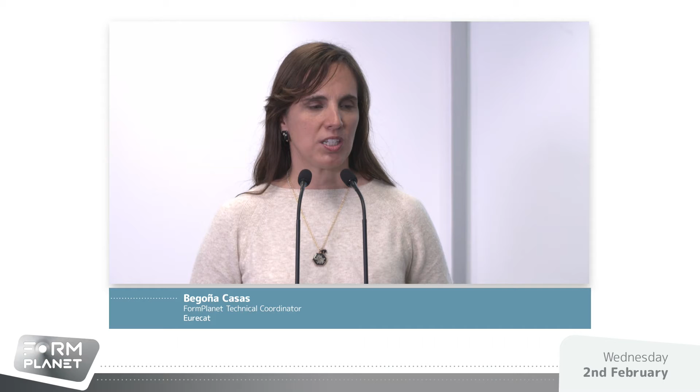Thank you very much, Michele. I'm going to present the demonstrators of the FormPlanet project. As we have mentioned during this day, we performed 19 demonstrators from different sectors and metallic alloys, to prove the effectiveness of the developed advanced testing methodologies and modeling approaches.

These demonstrators cover the whole value chain of the sheet metal forming industry, including sheet material developers, part makers, and end users. Concerning sheet material developers, we applied different characterization methodologies and simulations to optimize the forming processes of high-strength sheet metals, such as advanced high-strength steels, different aluminum alloys, and multi-layered sheet metals.

Also cold-rolled steels and stainless steels. Two case studies were performed with the company Aludium, an industrial partner of the project that produces aluminum alloys. These case studies concerned the automotive and cosmetic packaging sectors.

In the first one, we predicted the edge cracking resistance of a new aluminum alloy by evaluating the fracture toughness using the methodology based on the essential work of fracture, explained before in session 1. The second case study related to cosmetic packaging.

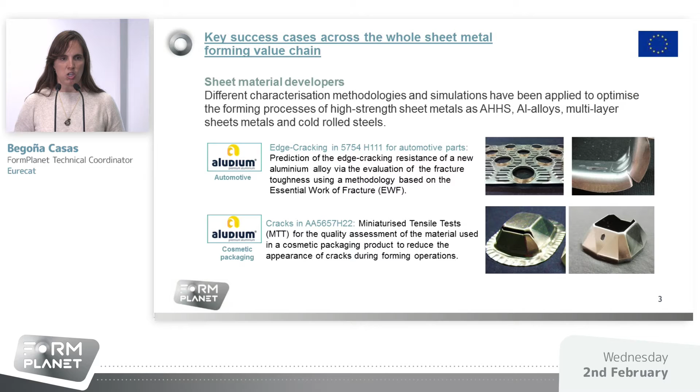Another sheet material developer is ArcelorMittal. It produces steels for automotive applications, and this case study consisted of predicting crash performance in advanced high-strength steels for hot and cold forming through lab scale testing methodologies.

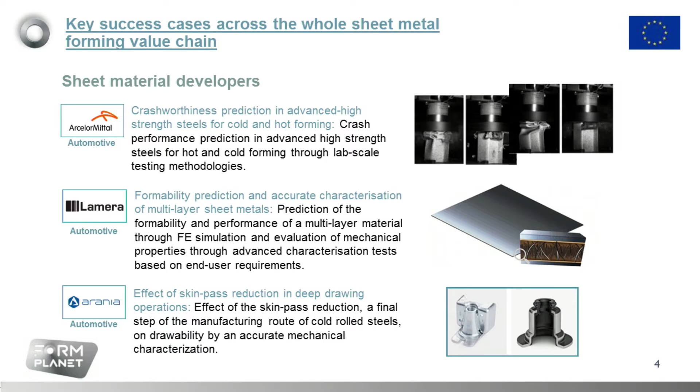Another case study was done with Lamera, who produce multi-layer sheet metals for automotive applications. In this case study, we predicted the formability and performance of a multi-layer material developed by them through finite element simulation, evaluating mechanical properties through advanced characterization tests based on end user requirements.

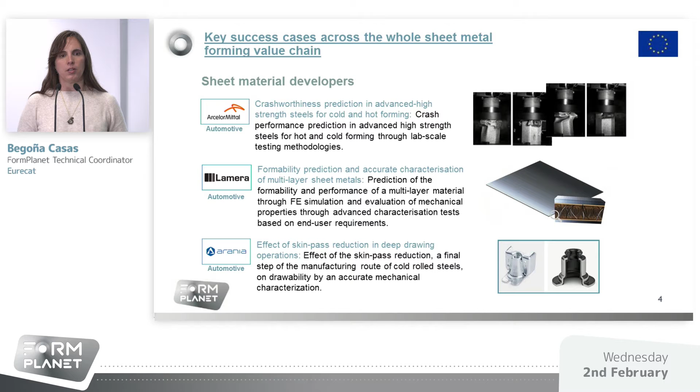With Arania, which produces cold rolled steels for automotive applications, we studied the effect of skin pass reduction, a final step in the manufacturing route of cold rolled steels, by performing drawability tests and accurate mechanical characterization.

Also with Arania, we performed another case study related to predicting the behavior of material for fine blanking operations through fracture toughness evaluation tests using the essential work of fracture methodology.

With Replasser, one of the selected companies for the open call, which produces hybrid composites, this case study was for the home appliances sector. We evaluated the formability of a novel sheet metal product consisting of two metallic coated layers bonded by an adhesive, through drawing tests and bending tests.

With part makers, the test sites performed tests and simulations to try to improve the manufacturing processes of complex parts with high-strength sheet metals.

One of these case studies was done with the company Arçelik, which produces home appliances. We worked on the characterization and optimization of the clinching process in the manufacturing of washing machine drums, using advanced mechanical characterization tests and FEM.

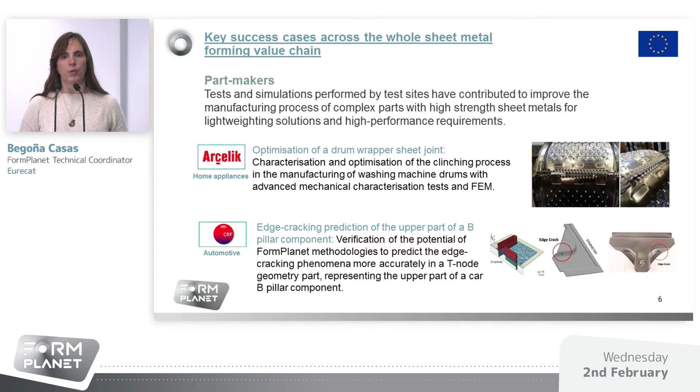Another case study was done with CRF for automotive applications. In this case study, we verified the potential of the FormPlanet methodologies to predict edge cracking phenomena in a T-node geometry part representing the upper part of a car B pillar component.

Another part makers case study was done with AP&T for automotive applications. We assessed the reduction of the try-out time of hot stamping dies by applying a FEM sheet forming simulation model based on material characterization data and forming parameters obtained during the hot forming process.

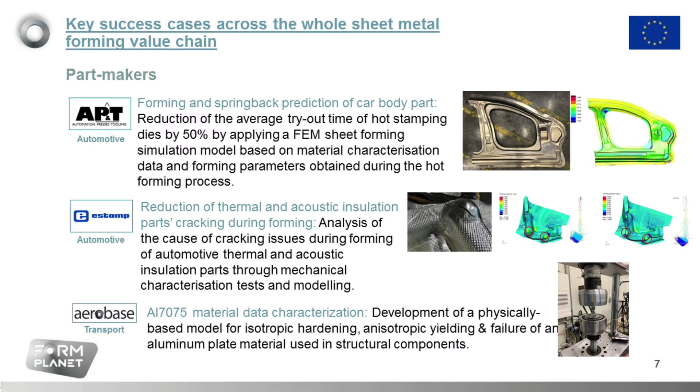Another case study was done with Estamp, another partner of FormPlanet, also for automotive applications. We performed analysis of the cause of cracking issues during forming operations of automotive thermal and acoustic insulation parts, through mechanical characterization tests and modeling developed in the project.

Another company that was selected during the open call is called Aerobase.

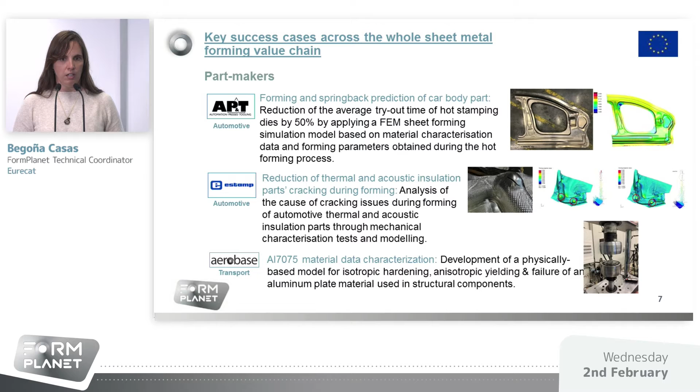The sector is transport, and for this case study, we performed the characterization, material data characterization of aluminum alloy 7075 for the development of a physically based model for isotropic hardening, anisotropic yielding, and failure of an aluminum plate material used in structural components.

Another company selected in the open call was Casconos Holding, also for the transport sector, and for this case study we characterize press hardening steel by fatigue. We measured the fatigue resistance, the hydrogen susceptibility, and also performed process modeling of a novel developed martensitic high-strength steel.

Another company selected in the open call was Stamp for automotive applications, and with them we study the combined influence of the pre-strain and the trimming on the edge ductility of high-strength steels.

Other company of the open call was MA for transport applications. We characterize press hardening steels. To do that, we performed finite element simulation forming, edge flangeability tests, diffusible hydrogen measurements, with the idea to prevent cracks in the flange area of a component manufactured by the press hardening steel process.

Other two part makers that were awarded in the open call were Mubea for transport applications and Pol-Welding for machinery and manufacturing applications. With Mubea, we have optimized the forming process of laser welded steel tubes with flattened ends made by cold stamping. In this case, we performed miniaturized tensile tests, finite element analysis, and fatigue tests to characterize and optimize this process.

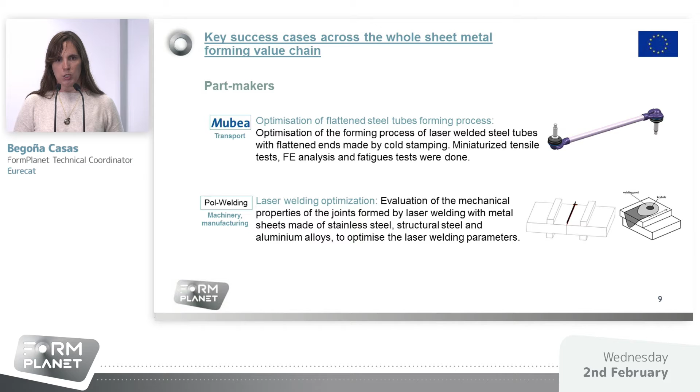In the case of Pol-Welding, we performed an optimization of laser welding. We evaluated the mechanical properties of the joints formed by laser welding with metal sheets made of stainless steel, structural steel, and aluminum alloys to optimize the laser welding parameters.

And finally, concerning end users, we performed two case studies. The first one with CRF for automotive applications, and this case study consisted in the implementation in a real production plant of an equipment for the monitoring of hydrogen content in raw materials and stamped components for transport body-in-white parts made of USIBOR 2000.

And the last case study was performed with Arcelik in the sector of home appliances. The idea here was to improve the forming behavior of a refrigerator compressor shell. We investigated the cause of tearing and thickness reduction on the surface of the shell during deep drawing via sheet metal characterization tests.

These are the 19 demonstrators that we have performed during the FormPlanet project, both in the main task and in the task concerning the open call, and that's helped to validate the characterization methodologies and modeling approaches that we have developed in the FormPlanet project.

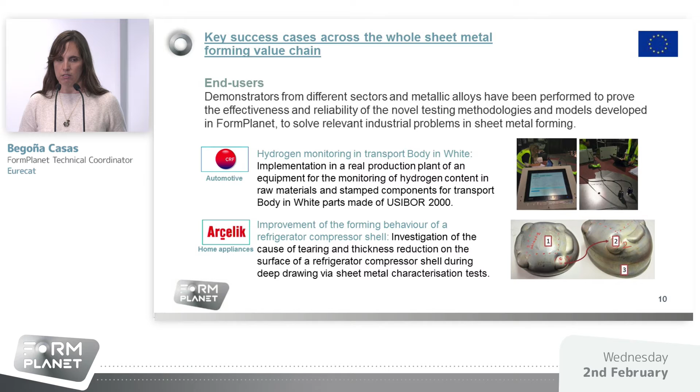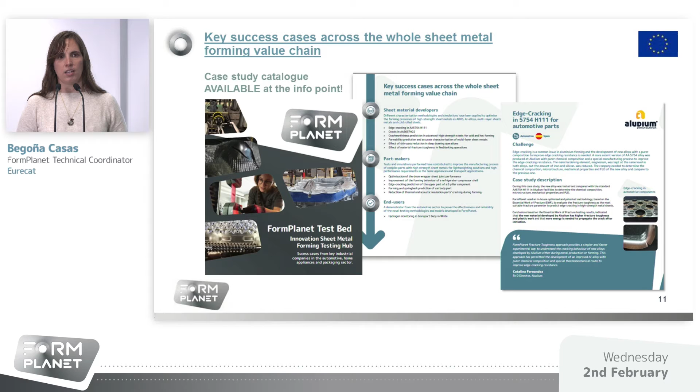In this session, some of these case studies have already been explained a little, and also in this session some of them will be explained with more detail. But you can find all the information in the case study catalog available at the info point. Thank you very much for your attention.

Thank you, Bego, for your interesting presentation and for giving us the opportunity to discover all the test cases analyzed during the FormPlanet project.

Okay, so now is my time.

In this presentation, as anticipated by Begoña, we will see the hydrogen monitoring in press-hardened steel used for body-in-white components. This is the agenda. We will see briefly what we have done using the USIBOR 2000, a new press-hardening material, the measurements we did together with Letomec about the diffusible hydrogen on the stamped component and the raw material, and finally the conclusion.

First of all, the goal of this study is to implement in a real production plant a control of diffusible hydrogen to prevent delayed cracking due to this kind of element.

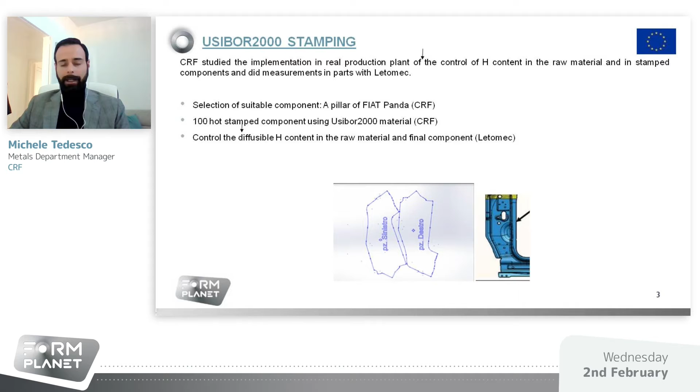For this purpose, 100 blanks were stamped using USIBOR 2000 in ex-FCA plants, and on that, together with Letomec, we checked the value of diffusible hydrogen into the raw material and on the final components. Here are some pictures as the material arrived in our plant.

Thanks to the collaboration with ArcelorMittal, they provided us the blanks directly laser cut to be stamped as they are, and each blank was marked with several codes that specified different conditions of the process.

The conditions and parameters that we studied during this activity are different. We focalized our attention on two different parameters. The first one is the dew point control that we have in the oven, and the second is the dwell time, the time that the blanks stay in the oven.

The dwell time usually for the press-hardening component with a thick layer of coating is between 300 and 600 seconds, while the dew point generally is set up around -7 to -5 degrees centigrade. But we tried also to modify this parameter to see what could be the results on the final component.

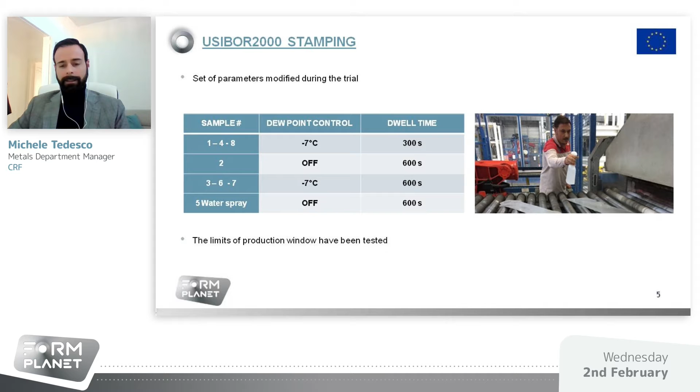Based on that, we would like also to test the worst condition, indicated as number 5, in which we turn off the dew point control in the process. We leave the blank at the maximum time in the oven, and as plus, we sprayed water on the upper side of the blank.

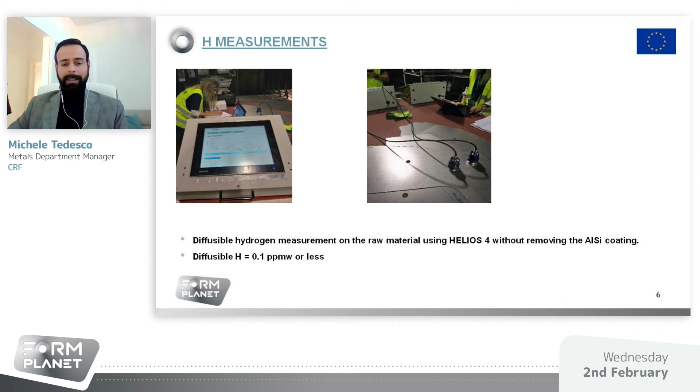This was to test the limit of this material and of our process. Before stamping the component, we did together with Letomec the measure of diffusible hydrogen on the raw material as received in our facilities. To do that, we used the Helios 4 system without removing the surface coating, and we found that the material was very clean; very poor diffusible hydrogen was detected, less than 0.1 part per million.

After the stamping, we performed the same analysis, the diffusible hydrogen measurement on the stamped component in different areas of each component, because changing the areas, the concentration could also change, since the cooling under the die is not uniform and depends on the shape of the component that we are stamping.

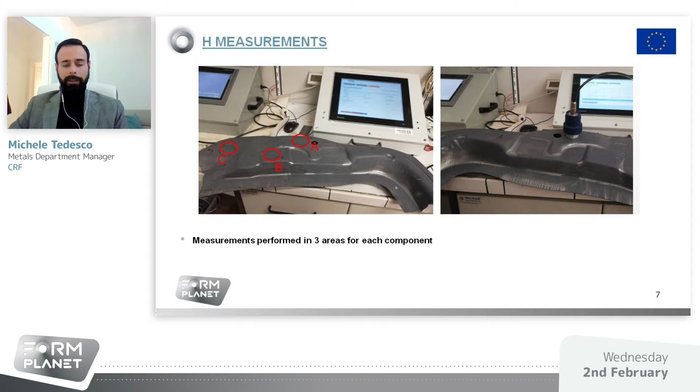So the first sample is number 2, in which we set the dew point off as parameter, and we leave the blank at the maximum time into the oven.

And the second component where we found a high value of diffusible hydrogen was sample number 5, the component that was stamped without the dew point control, leaving the sample at the maximum time, and also applying the water spray.

After this characterization, looking at what was the maximum value of diffusible hydrogen absorbed by the material, we carried out together with Letomec and the University of Pisa the slow strain rate test, to see if this quantity of diffusible hydrogen could have an effect on the mechanical properties of the material.

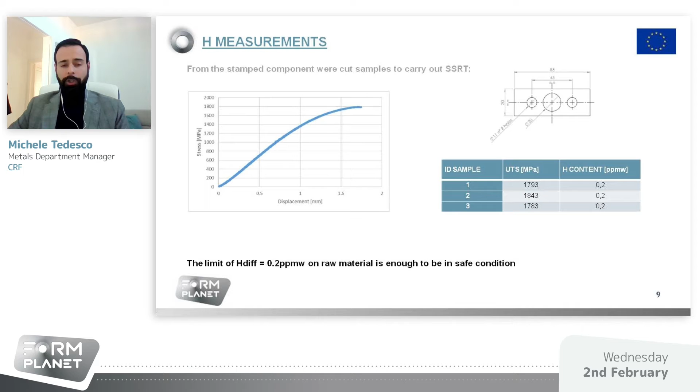The results were very positive, because the mechanical properties still remained the same as the virgin material, and this means that the material, also in the worst case, is in a safe condition. For this reason, the materials engineering of Stellantis gave the validation of Usibor 2000 to ArcelorMittal.

In conclusion, we can say that there is a non-destructive method to control the hydrogen content in the material before and after the hot press forming. Knowing the hydrogen material threshold, it is possible to prevent delayed cracking of the component by checking the component after the hot press forming. So this gives us the opportunity to have no claims after component production.

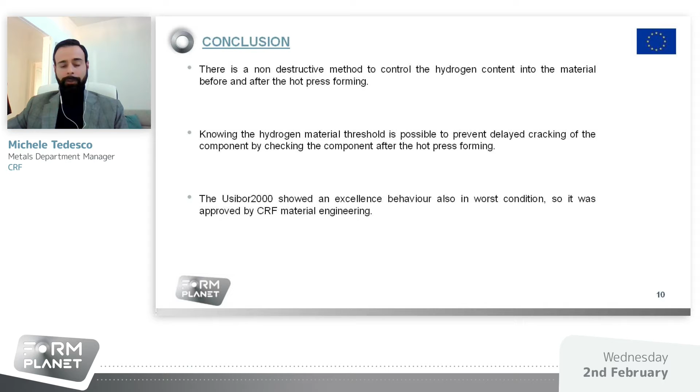The Usibor 2000 showed excellent behavior, also in the worst condition, so it was approved by Materials Engineering of CRF and Stellantis company. So we plan to use this material soon to reduce the weight of our future cars.

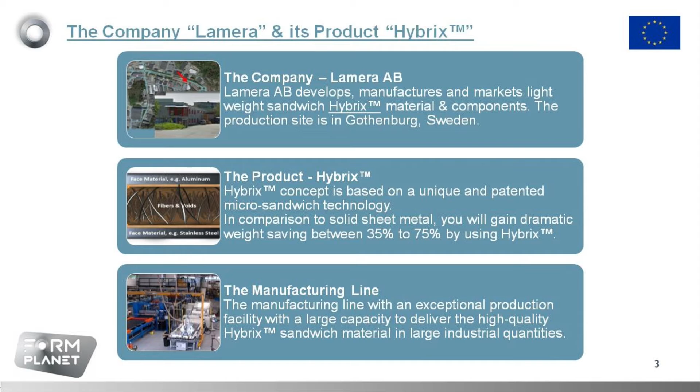The Hybrix material, the total concept of the material, is actually a patented micro sandwich technology. If you compare this material with solid sheet metal, you can save between 35 to 75% of the weight by using Hybrix, highly dependent on the type of component and application area. The manufacturing line has huge capacity and delivers high quality material.

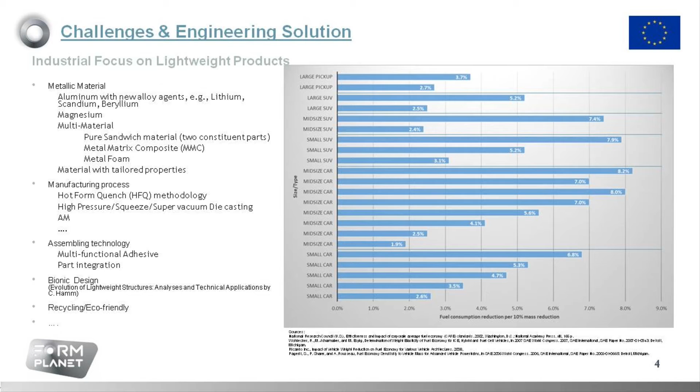This is about the company, and now the challenges we have. We know that industry is focusing on lightweight products and trying different solutions, for example using multi-material, metal matrix composite, pure sandwich material, metal foam, or material with tailored properties, in order to find a proper solution for lightweight. They use different manufacturing processes, for example hot forming, and different assembly technology, such as multifunctional adhesive or part integration.

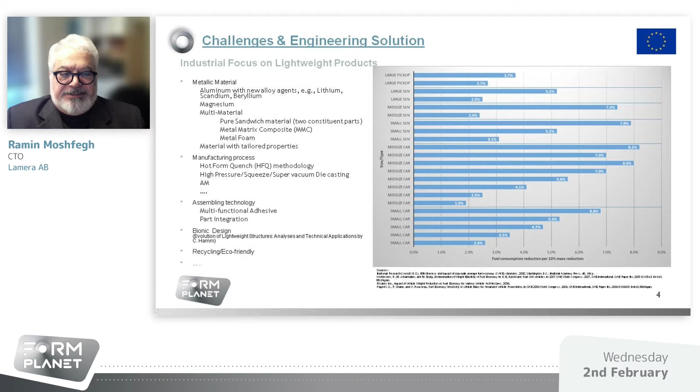You can see there are many challenging parts when you want to introduce a new material, especially for the automotive industry and other products. For example, is it good enough to implement this material? Does the generation of the product fit our traditional production line? How can we manage assembling time, construction and design, cost, and many other things?

One of the tools we are using is CAE and computational based design, which is very central knowledge in the automotive industry especially.

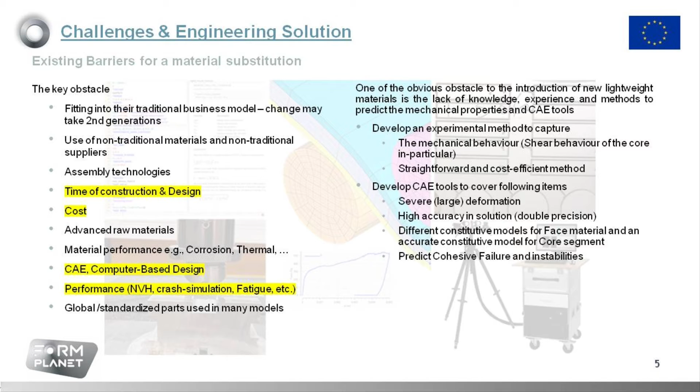Our task here, in order to eliminate all those obstacles, is to develop an experimental method to capture the mechanical properties of the material, especially shear condition for sandwich material, in a cost efficient way. Most experimental setups I could find in the literature, from universities and elsewhere, were not cost efficient and took too long to get results. That's not good at all for an SME.

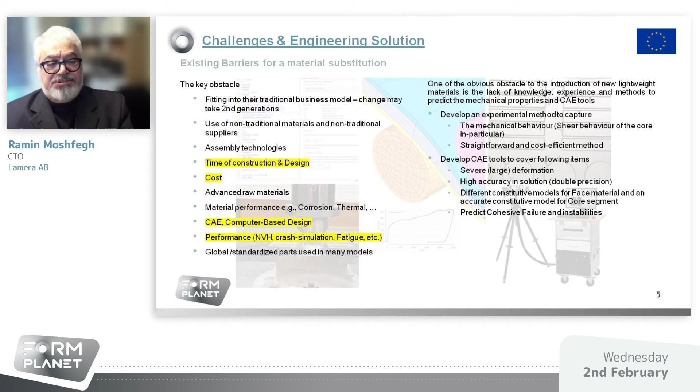In the same manner, we looked at how we can use CAE tools to predict results from multi-layer material with large deformation and high accuracy, for example double precision results, using different constitutive models to predict cohesive failure and instability.

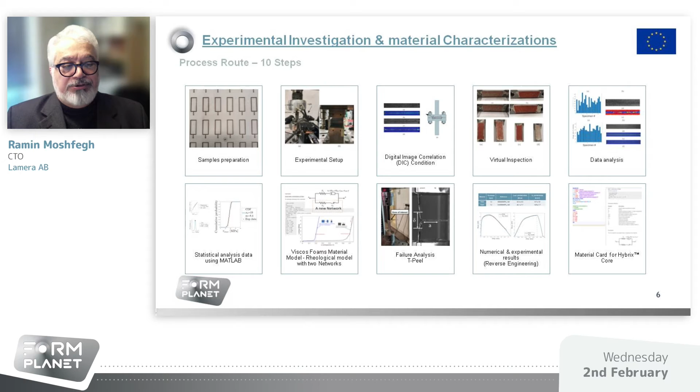I call this a process route with 10 steps. The first step is the experimental investigation, which we did in cooperation with Eurecat and Lulea University, with Lulea University as the main part. Here we can see the 10 steps, how you allocate the experimental result for the material and use it directly in your simulation tools. Here at the end, you can see the material card, how we use it for our simulation model.

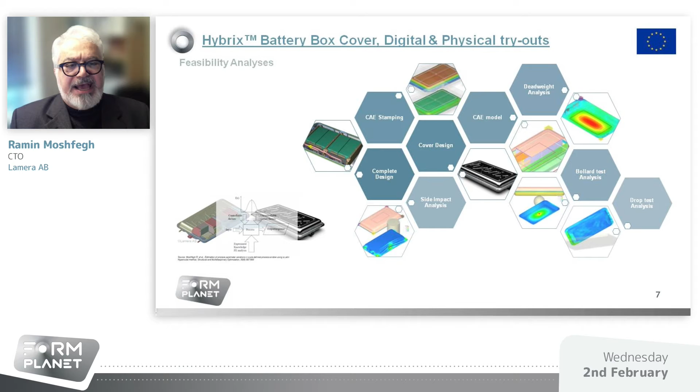Of course, when talking about a new material, it should fulfill many requirements. For example, is it able to catch the side impact analysis? Is it good enough with dead weight? What happens if there's an impact coming under the battery box, or if somebody drops it on the floor? We made our simulation for all these things in this project, and we can see how to design the stamping tool for that.

For this purpose, we made different types of sandwich material. We call it CC 0.2, 0.2, PC 120 - meaning this is carbon steel on both sides, the face material thickness is 0.2 millimeter, the core is the fiber core especially for Hybrix, and we have different types of adhesive system. This is a C adhesive, and 120 means the total thickness is 1.2 millimeter.

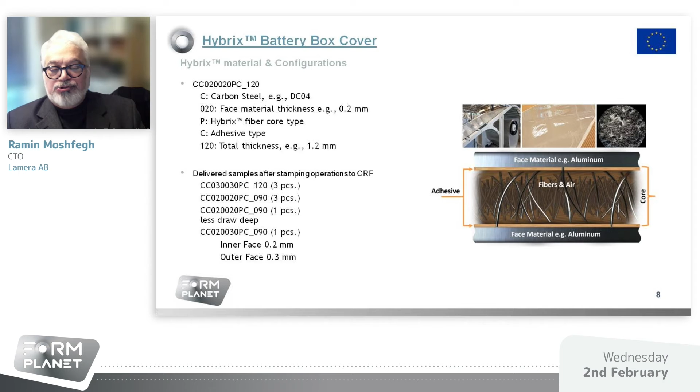We made all those battery boxes based on those configurations, and sent those material numbers directly to CRF in order to see if it's good enough or not.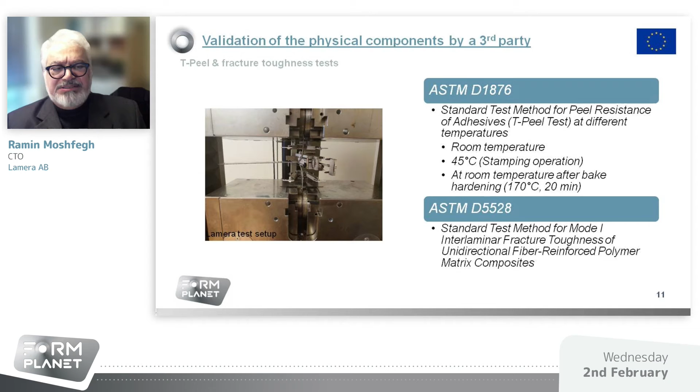One of the important validation aspects was to make an ASTM, standard test method, in order to see that the product is feasible after the forming process, before the forming process, and what happened with the material—is it durable or not. CRF took care of that.

They made the non-destructive control, macrographic analysis, and the ASTM D1876. It was very interesting that they made the experimental procedure in different temperature configurations, to simulate being in the forming process and going from the painting process.

You can see that at room temperature, at 45 degrees, and with simulated bake hardening, the load per width values clearly fulfill the requirement CRF has in order to say the material is okay, coming to our material department, and we can start to work with that.

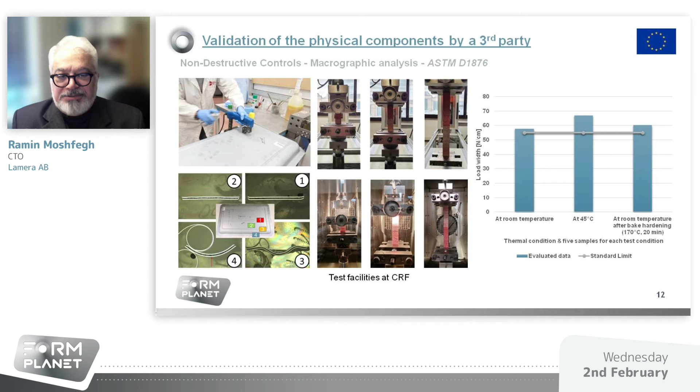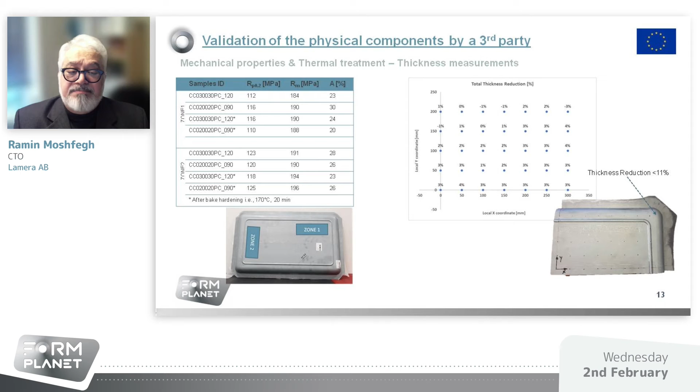We made an experimental procedure for thickness reduction, and we could see, taking the material directly from different parts of the formed product, if it made a measurement showing the material loses performance basically after the forming or not. That showed it's good enough, actually.

So finally, in conclusion, I can tell you—I don't need to go through all those things for you—that we could make a lightweight product. We established a methodology using CAE tools in order to make the feasibility analysis of the product. Two different software were used, LS-DYNA and Impetus, because we wanted to show this is not only one software for the end user. We established a new experimental setup.

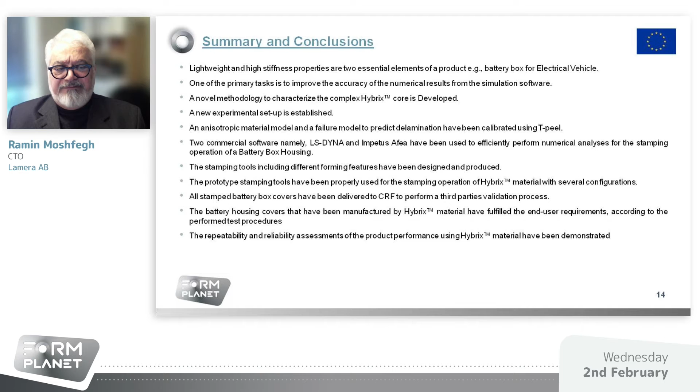It is very cost efficient, and we know how we can do that. It's very simple to produce that tooling setup, and we made the robustness analysis in order to see the repeatability of the product. We were also happy that our third party project member could make experimental evaluation and validation of the product. Thank you very much.

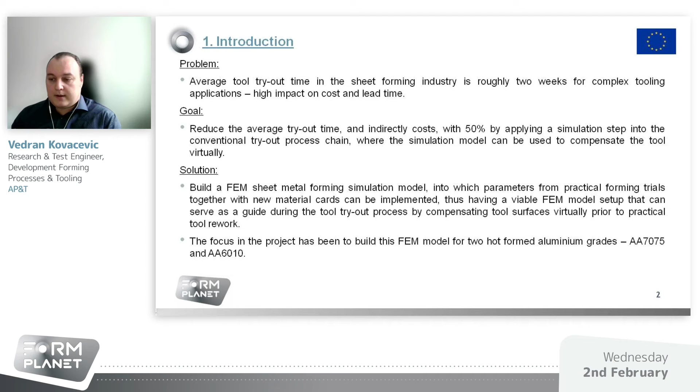FEM models were built for two hot-formed high-strength aluminum grades, namely AA7075 and AA6010. The practical forming trials were executed in AP&T's aluminum test line. The test line is equipped with a multi-layer convection furnace and a 600-ton servo-hydraulic press.

To execute the trials, we used a scaled car door ring to form parts with a sheet thickness of 2 millimeters. The following test procedure was implemented.

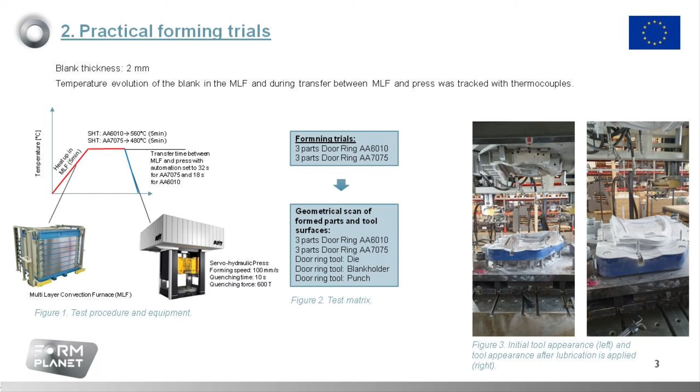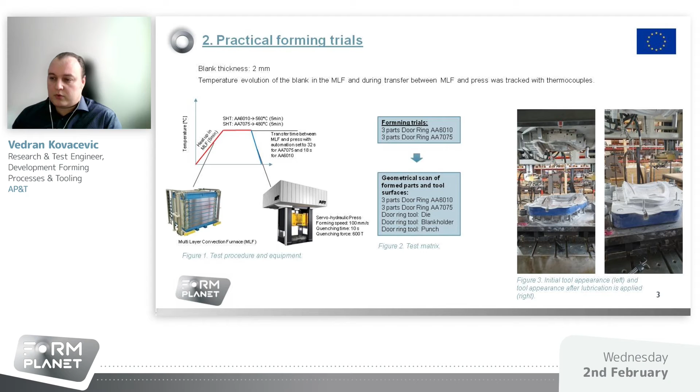First, the blanks were heated in the MLF to a solutionizing temperature of 560 degrees for AA6010 and 480 degrees for AA7075. The blank was then transferred from the MLF to the tool in the press, where it was formed at an average speed of 100 millimeters per second, followed by quenching at 600 tons for 10 seconds. We formed 3 parts from each alloy, respectively.

Throughout the practical trials, we measured various parameters, but two of the most influential ones are the slide speed and the cushion force from the press. Both parameters are constant set values to control the press, but the actual output yields a non-linear result.

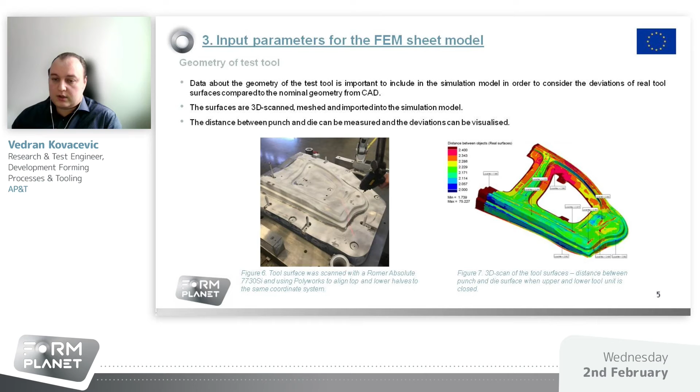After forming, the tool's surfaces were 3D scanned in order to visualize the difference between the nominal CAD geometry and the actual tool geometry. The scanned tool surfaces were then meshed and imported into the simulation software PAMSTAMP.

Apart from the tool scans and the press kinematic parameters that we gained from the forming trials, the FEM model would be incomplete without the proper material cards for the alloys. From previous work, AP&T already had access to heat transfer coefficient depending on gap and pressure for the alloys, but lacked flow curves and anisotropy values. Therefore, together with our project partners Fraunhofer and COMTES, we defined a characterization matrix for hot tensile tests that were performed.

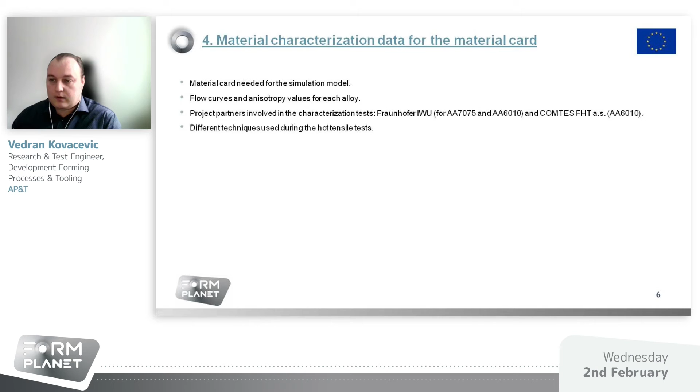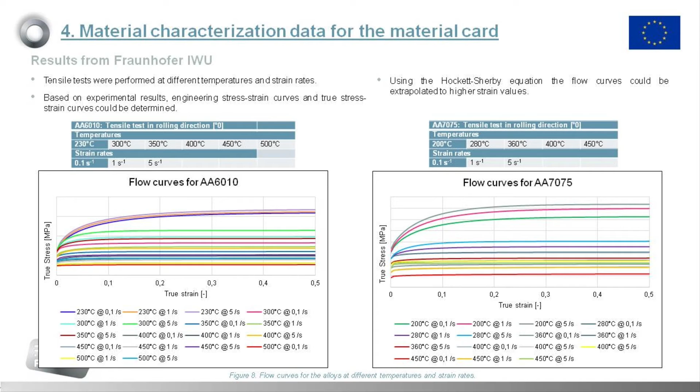Fraunhofer performed tests for AA6010 and AA7075 at different temperatures and strain rates according to the tables, in order to obtain the data needed to describe the plastic behavior in the material at elevated temperatures. By implementing the true stress strain curves gained from the experimental results into the Hockett-Sherby equation, it was possible to extrapolate flow curves to higher strain values for the alloys.

In addition to the hot tensile tests, Fraunhofer also performed tests in three different load states to describe the forming limit characteristics of the alloys. This was done for uniaxial strain, plane strain, and biaxial strain. Unfortunately, due to equipment restrictions, the strain rate used during these laboratory tests for the 7000 alloy was very low, and as will be shown later, this does not reflect the real strain in the material behavior for this hot stamping application.

COMTES had a different experimental approach for the hot tensile tests. They performed the tests on the 6000 alloy. The main difference being that the hot tensile tests were conducted at different strain rates and at a wider temperature range than the tests from Fraunhofer. In addition, they used a different method of heating up and cooling down the samples during the experiment.

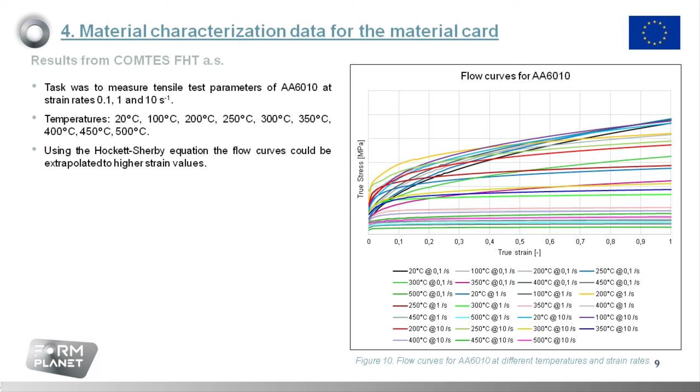After we formed all the parts, we also scanned the formed parts in order to have the sheet thickness information of them. The scans were used to validate the FEM simulation by comparing the sheet thickness of the formed and simulated part. The regions marked in red show a tendency of high thinning, and together with the regions that exhibit a crack for the 7000 and strong necking for the 6000, they can be used for validation.

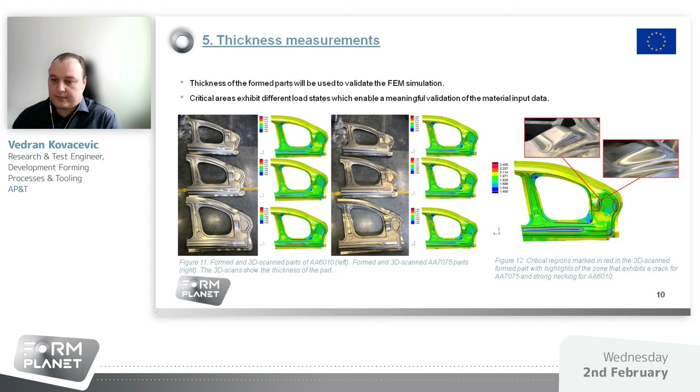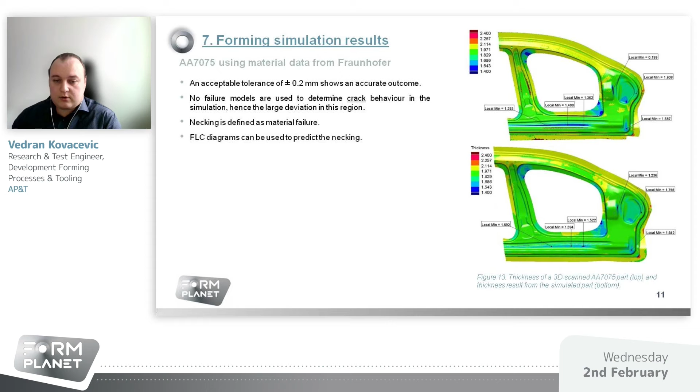Coming to the results for 7000, I can mention that we used the material model Barlat 2000 for all simulations. Looking at the result for the 7000, comparing it with the 3D scanned formed part, it shows a quite accurate outcome. There's a deviation of plus minus 0.2 millimeter, which is acceptable.

In the region where the crack occurs, in the simulation there is a strain rate of 0.001 per millisecond. Since the time unit system in PAM-STAMP is milliseconds, this equals a strain rate of 1 per second. Applying the FLC data from Fraunhofer to the result shows that this zone is safe, which is not the case as the crack occurred here. The reason for this is, as mentioned, the low strain rates used during their experimental tests at Fraunhofer, which is lower than the strain rate during the actual forming procedure.

Looking at the 6000 result, the simulation also shows accurate thickness behavior. The deviation in the critical zones is within plus minus 0.2 millimeter, and the zone where the strong necking occurs is validated with the FLC data from Fraunhofer.

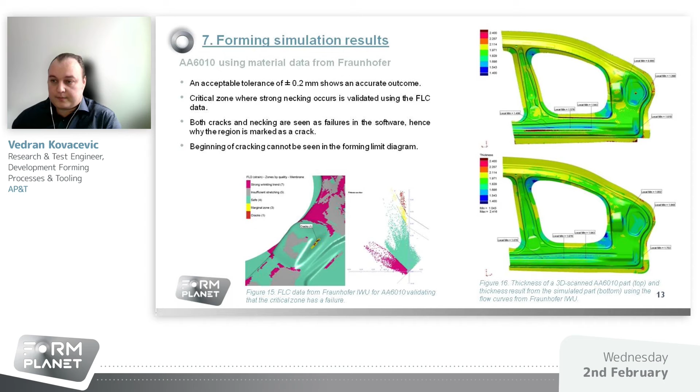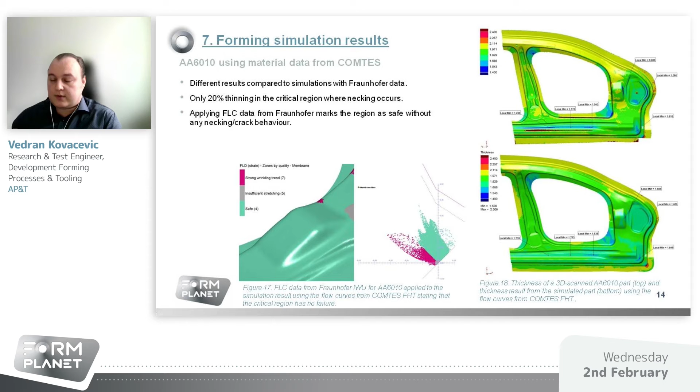To sum up, the simulation results for both aluminum alloys show promise in terms of thickness behavior compared to the formed parts. However, it is challenging to apply the same process route, which is usually present in an industrialized hot forming process, to the hot tensile tests conducted by Fraunhofer and COMTES.

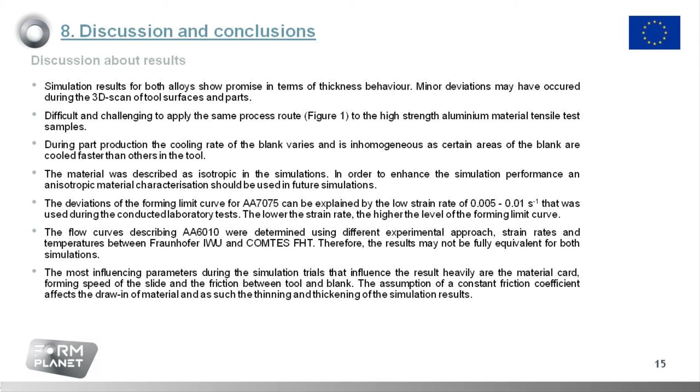Further, it must be highlighted that the flow curves describing AA6010 were determined using different experimental approaches, strain rates and temperatures between Fraunhofer and COMTES. Therefore, the results may not be fully equivalent for both simulations. The materials were described as isotropic in the simulation, which also might lead to less accuracy of the calculated results. In future projects, an anisotropic characterization of the material should be investigated, of course.

The friction coefficient is one of the most impactful parameters in hot forming. In the simulation, it was assumed to be constant. However, in reality, the friction depends on temperature, speed, pressure, and lubrication amount. The friction affects the draw-in of material and, in the end, the thinning and thickening results.

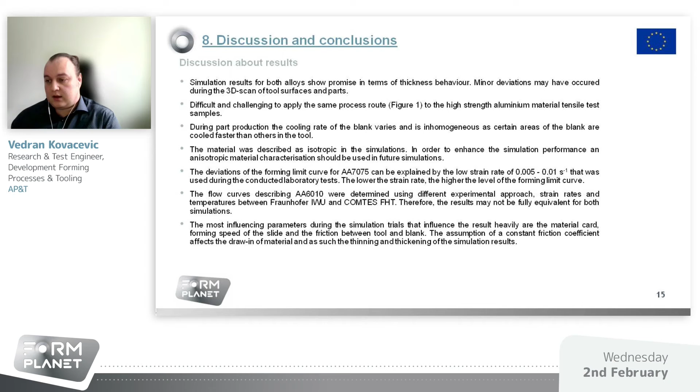To conclude, the simulation results are satisfactory in terms of feasibility analysis to predict the thinning and thickening behavior of the part. The material input data from Fraunhofer and COMTES can be used for future work and forming simulation of other part geometries. After the submittal of the report, we also made a virtual tool compensation in order to see if there would be a better contact distribution between blank and tool surfaces.

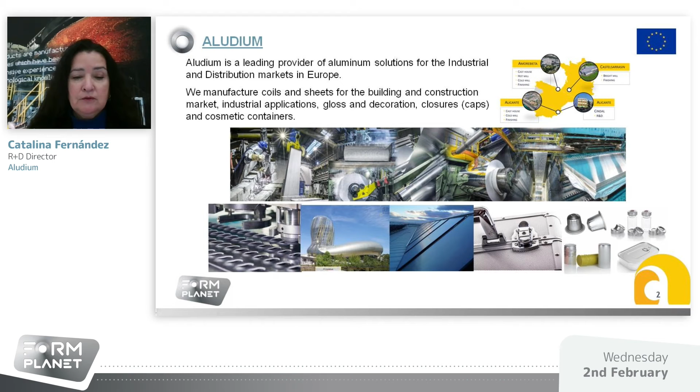First, a short presentation regarding Aludium. Aludium is a leading provider of aluminum-rolled products for different markets, such as automotive, industrial, building and construction, decorative, or cosmetic packaging.

During this case study, a new version of the 5754 with a special chemical composition and thermomechanical route was tested and compared with the standard material.

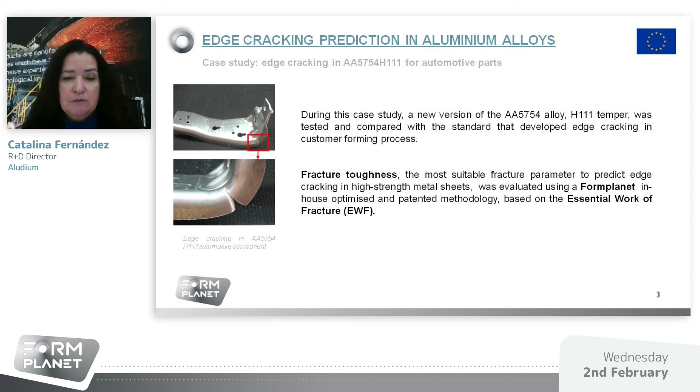Fracture toughness, the most suitable fracture parameter to predict edge cracking in higher strength metal sheets, was evaluated using a FormPlanet in-house methodology based on the essential work of fracture.

In Aludium facilities, we determined the chemical composition, microstructure, and standard mechanical properties of both materials, called OK and no OK in this presentation. In the trial material regarding chemical composition, the main hardening element, magnesium in this alloy, was kept at the same level, but the amount of iron and silicon main impurities was reduced.

Both materials present a fine recrystallized grain structure, ASTM number 8 and 8.5, quite similar. But as a consequence of its higher purity, the new material shows a slightly coarser grain size, detrimental for the stamping process. Regarding the tensile test, the results are quite similar.

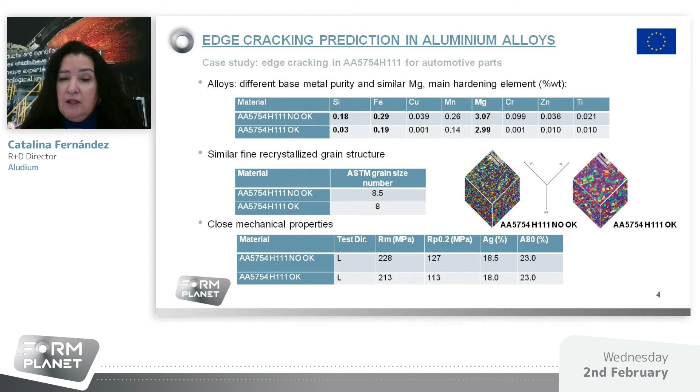Also, we can conclude in this first part that the standard metallurgical studies are not able to predict the edge cracking.

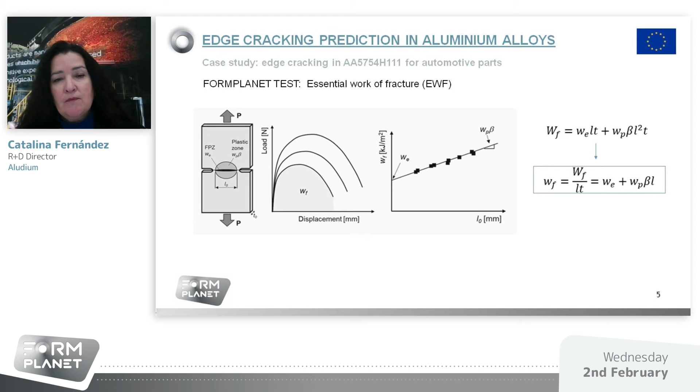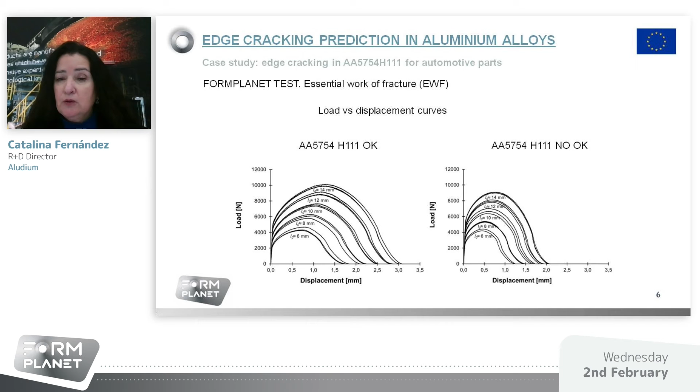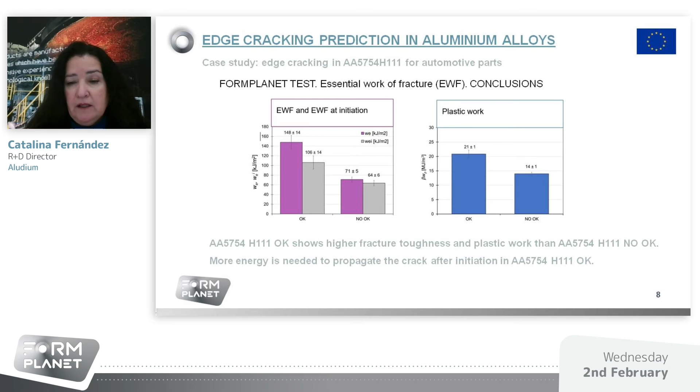Here is a graph summary of the result. The conclusion we can take from this test, the essential work of fracture, is that the OK material shows a higher fracture toughness and plastic work than the no OK material, and also that more energy is needed to propagate the crack after initiation in the OK material.

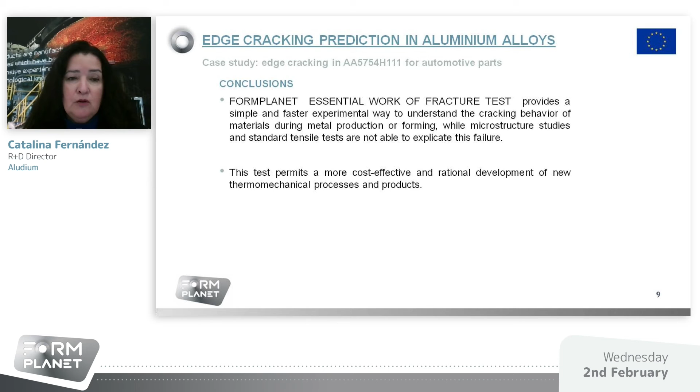Our conclusion regarding the FormPlanet test used in this case study is that the essential work of fracture test provides a simple, faster experimental way to understand the cracking behavior of material during metal production or forming, while microstructure studies and standard tensile tests are not able to explicate this failure. Also, these tests permit a more cost-effective and rational development of new thermomechanical processes and products in aluminum alloys.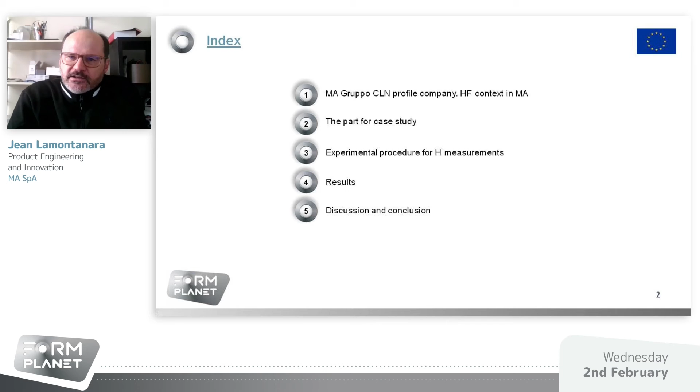Here you can see my agenda. First, I will say a few words about the company and its products, and go deeper into the hot forming process. After that, some explanation about the part we decided to use as a case study together with the FormPlanet Consortium, the measurements and results in terms of diffusive hydrogen, and at the end some discussion and conclusion.

About the company: MA CLN Group has 3 divisions. We have metal forming, meaning stamping for automotive, named MA; company MW producing steel wheels; and another division dealing with steel distribution. We also have a central lab here in Torino.

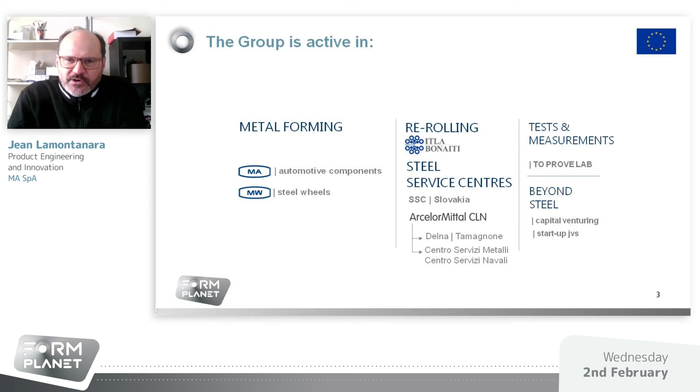On the next slide you can see some views about the products of MA, mainly the body in white for skin panels, structural parts, and also some chassis parts.

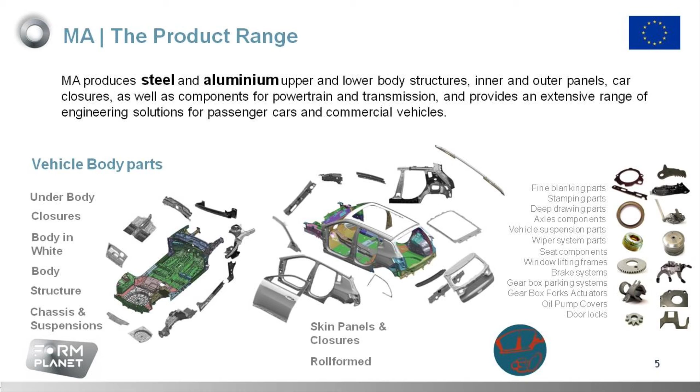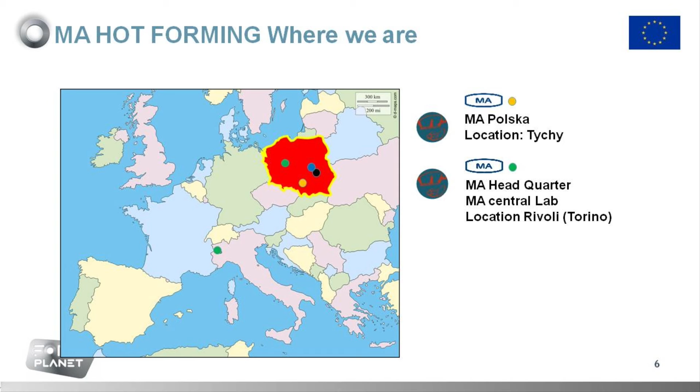Going on to hot forming: the facility is in Poland, in Tychy, inside the Stellantis plant, and working in close contact with the central lab we have here in Torino.

Here are some views about the line in Tychy. On the top right you have an overview of the line: we have a long tunnel furnace with gas, a hydraulic press, and the exit. On the bottom right, some details about the machinery, about the hot blank out of the oven. We also have laser cutting, and you can see the parts we are producing right now.

Some features about the hot forming: we have a hydraulic press of about 12,000 kilonewton power. We can process all kinds of 22 manganese boron-5 coated, aluminum silicon materials, what are well known as Usibor 1500 megapascal, also Usibor 2000, and so on, for material thickness ranging from 0.8, 0.7 to 3 millimeters. The furnace has 15 control zones, and we have a dew point control that can guarantee less than -5 degrees. I will go into detail about the dew point control.

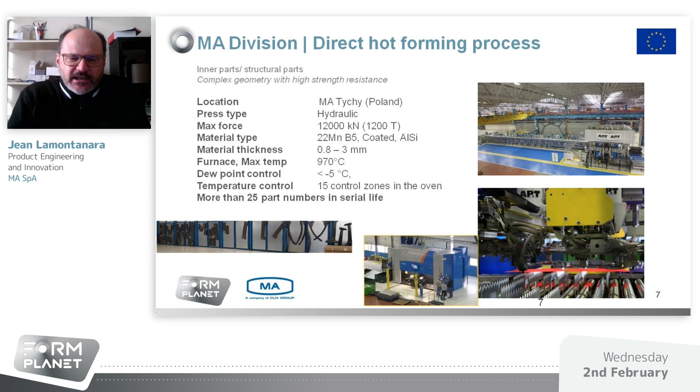About the control: in this facility we have a lot of process parameter control, for sure, as Michele said, temperature, dwell time, and so on. But in the frame of hydrogen, a key factor is the control of dew point. We have a built-in system in the oven, a closed loop system.

The yellow image you can see in the middle is the dry air compressor. We produce dry air that is put inside the oven in areas where we don't want hydrogen. We have a measurement system and continuously measure the hydrogen, so the dew point control is measured and those data are recorded. We also have many other process parameters under control, like temperature, speed, time, water, and so on, all recorded in special files.

So about the case study, we chose an interesting part with Letomec and Unipi. On the bottom left you can see the part - it's a pillar, thickness 1 millimeter, that has been in serial life for 2-3 years now.

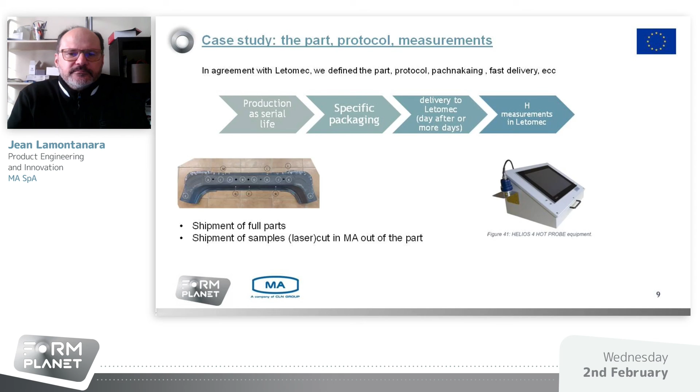So here we have the results. Some areas were measured for the diffusive hydrogen, and we can see that on all the samples measured by Letomec, we have some very low values in terms of diffusive hydrogen. A lot of points are at 0 or 0.1, or maximum 0.2. So we are quite happy - it's not a surprise for us, this kind of result.

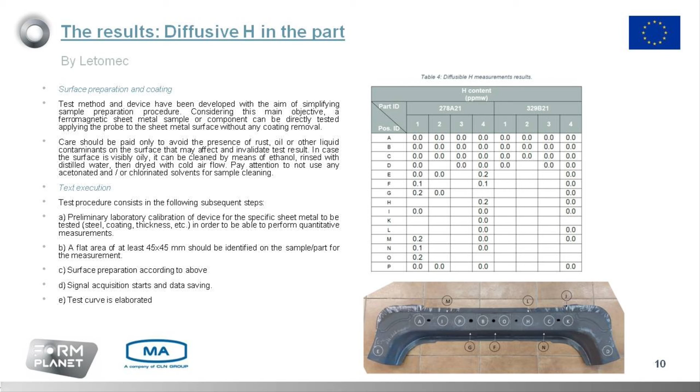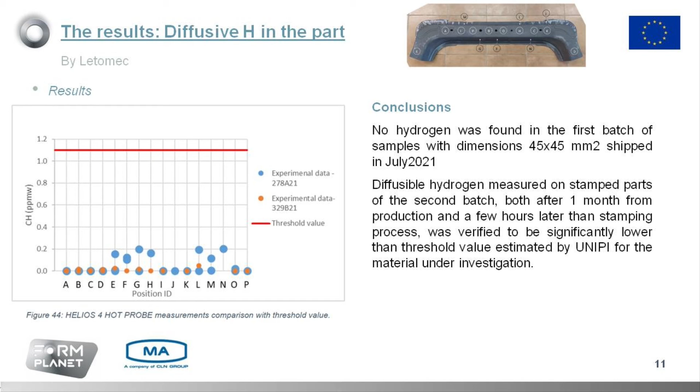And here these results are put on this table. So we have the threshold here - the red line is the threshold established by Unipi, and the blue points and the orange points are the measurements on our parts, and we are well below the threshold, well below. So we are quite happy again about this kind of result.

So as a conclusion, we can say that the Letomec measurements confirm furthermore that our recipe, in particular the respect of a good dew point in the oven, means our parts are fully okay. And we can say that at this stage we have no risk of delay fracture on the parts.

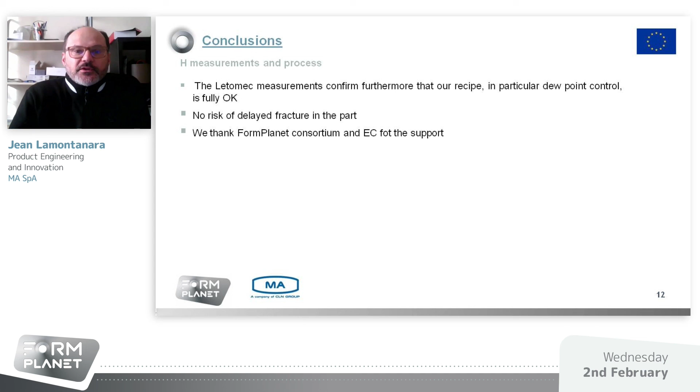So this instrument was very useful to confirm that the quality of our part in terms of risk of delay fracture, our parts are very good. Thank you for your attention.

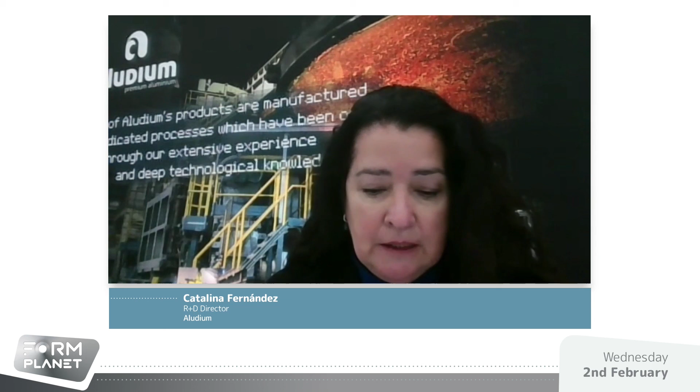Okay, iron and silicon - iron is the most insoluble constituent element in aluminum, so it segregates from the first step of solidification during casting, forming a constituent, quite a big intermetallic particle together with aluminum, silicon, and sometimes manganese. These big particles create voids during hot rolling and cold rolling. This is a preferential site to produce cracks later on during forming. So it's not a beneficial effect - the iron in the semi-continuous casting process is not able to precipitate as small particles, it just constitutes big particles.

Thank you very much, Catalina. And another question that contains 2-3 more questions for you: fracture stress difference between not-okay and okay alloys? The higher the fracture stress for the same tensile strength, the higher the edge crack sensitivity.

Was a hole expansion test, conical expansion, done between both alloys? Was fracture area reduction performed between both alloys? Sorry, what is the question?

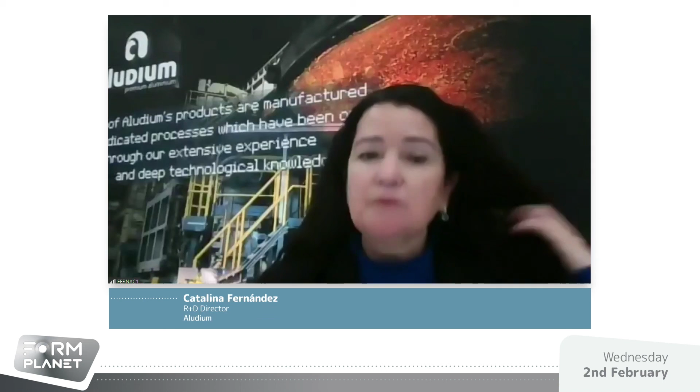The question is if you did the hole expansion test on both alloys - yes. And if you performed the fracture area reduction on both alloys - yes. Both tests were carried out at the first step of the FormPlanet project when we sent this type of material to the different test beds to test new methods, the novel methodologies.

And really the results extracted from this type of test were not so clear as the essential work of fracture. Thank you very much, Catalina.

There is another question to me: Had you used the Letomec for stainless steel? This is a good question, thank you. Today the answer is not yet.

We focused our attention firstly on the component that we are using to limit the intrusion during the crash, so press-hardening material. In the second step, we would like to analyze also cold forming steel used in the body in white to absorb energy during the crash or to limit the intrusion. And for sure, in the third step, we will consider also stainless steel. So the answer to your question was not yet.